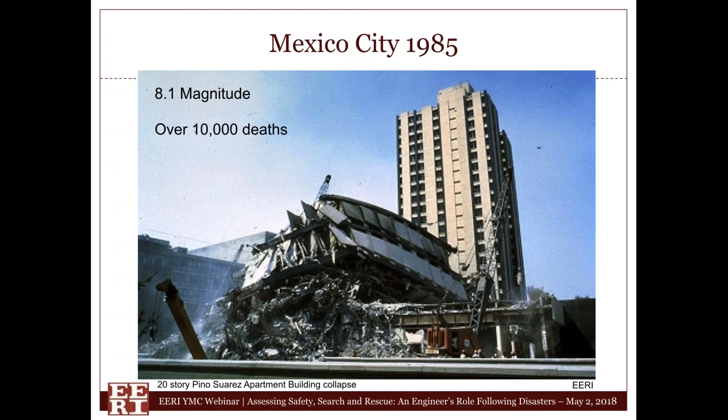A lot of the local fire departments have the ability to do light rescue and medium rescue, but heavy rescue takes a high specialization of intellect as well as materials. The collapse of the Juarez Hospital in Mexico City had many live rescues of people that were trapped. In fact, I believe the last live rescue was after 10 days. And it showed that a heavy rescue component to rescue people that were trapped was really needed in the U.S. And that's when it started, in 1990, the Urban Search and Rescue Program in the United States.

Currently, there's 28 task forces across the U.S. You know, California has an abundance of these, mostly because of the earthquake hazards that we have with the population centers. Florida has 2, mostly because of the hurricane potential out there. And there's a number around the Washington, D.C. metro area because of the sensitivity of the government operations in that area.

Now, with these task forces, there are a number of personnel all in a multidisciplinary role. We have, of course, the firefighter rescue components. We have the EMTs, search specialists, hazmat specialists, heavy riggers, and of course, the engineer will function in the structures specialist role. And there's communication specialists and logistical support. And they're all based usually around a fire department agency.

And when we get deployed, there's a type 1 deployment, and that's really the full task force, and it's up to 80 personnel. And there's typically 2 structural specialists that are normally civil or structural engineers that are deployed with this task force. The task forces are usually about 3 levels deep, meaning that if not everybody is available, there's certainly other people that can be drawn upon. So these task forces normally will have about 6 structural specialists on the rolls for deployment, and they'll draw 2 from that group of 6.

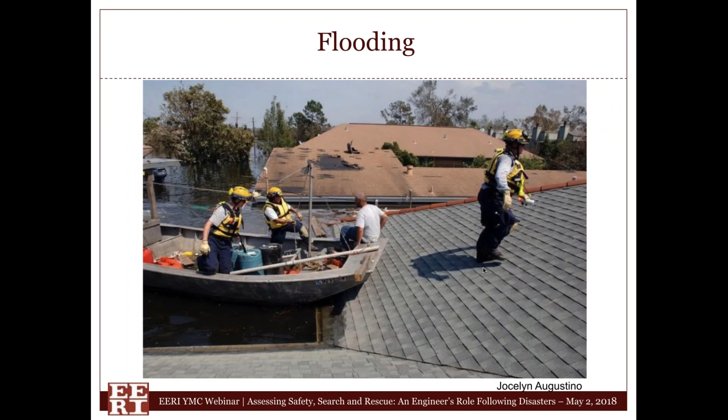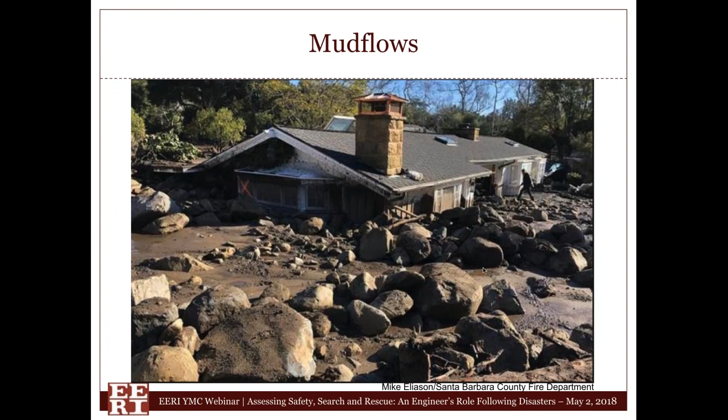Now, the role of the engineer in this task force, you need to understand that the work is being done in typically an unsafe building or an unsafe environment. And most will be multi-story buildings with heavy debris and potential for additional collapse. And the rescue and medical forces need to work in this environment if live victims are present.

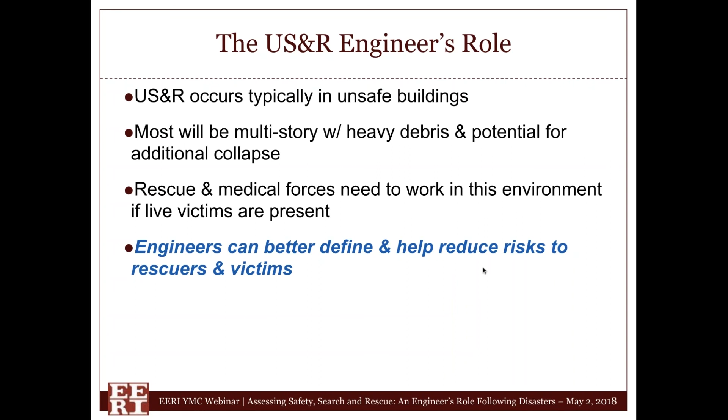So the engineer is there really to help better define and help reduce those risks to the rescuers and the victims. We're not necessarily there to actually do the heavy lifting, but to provide assistance and consultation as far as what we might see from our perspective. And our hazard assessment would be essentially identifying maybe those vertical and lateral systems to start, as well as determining really where that load path is most vulnerable.

Where is the critical load path, where are we standing, and where's the victim relative to that load path, and what do we need to move out of the way to retrieve the victim that might be in the load path? Is it brittle or ductile behavior as we're working on the building? So do we have any forgiveness if we make a mistake or if there's an aftershock? We check for redundancy. Again, we're looking for safety to the rescuers and ourselves and the victim.

And are the hazards something that can be mitigated to an acceptable level? Can we do it with shoring, or is there any toxic environment, hazardous materials that need to be taken care of first? Or is there a number of rats that are involved in some of the areas that have to be mitigated first before we can enter some of the environments? All these have to be taken into account.

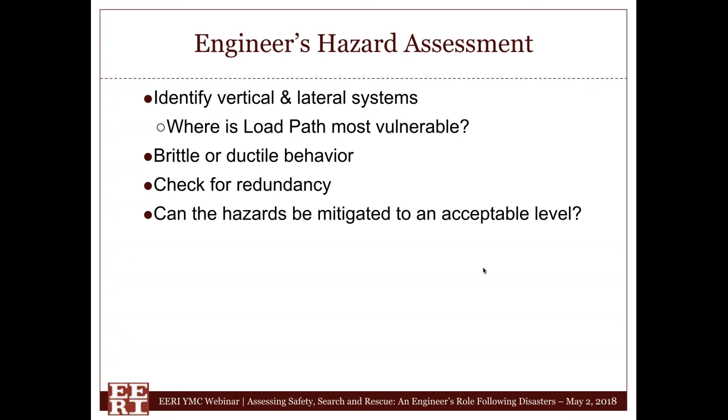So as far as what the engineer is looking at is, what is this risk during the mitigation? We're going to be putting in shoring, possibly, and is it a safe environment to work in while putting in the shoring, or is it just considered to be unsafe until the shoring is established? And we're going to be checking for potential instabilities along the way, both in the building and the rubble. A lot of times the rubble is considered to be unstable, especially while removing it.

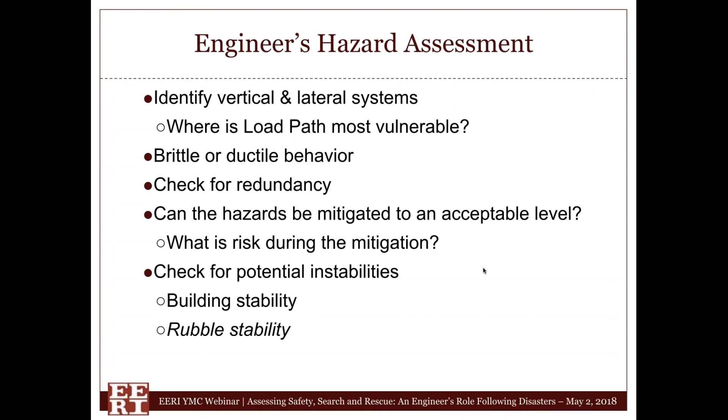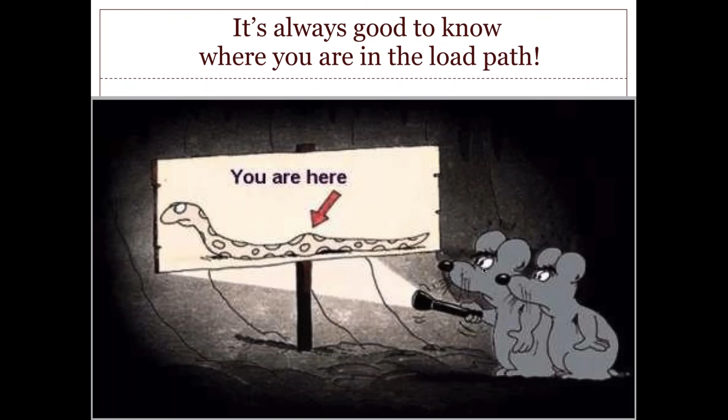It's always good to know where you are in the load path, because if you are in a bad portion of the load path that is very vulnerable to aftershocks, you may not want to be there and working there. So the engineer's assistance for the rescue, once the victim may be located and be retrieved, you need to determine the location and the condition of those voids. With our knowledge of buildings and building collapses, we may have a better idea where survivable spaces may be.

Not only that, but if we know we have a victim or someone we're going to retrieve, we're probably in a better situation to predict what materials are going to be anticipated as we're trying to breach into that cavity. Are we dealing with post-tension concrete, or is it just simply standard concrete? Is that masonry hollow core, or is it simply going to be solid grout with reinforcement? And is this concrete topping we're finding on the floor just an indication of a thin, lightweight concrete topping over wood, or is it actually something much more robust?

And we can help provide assistance to the rescue crews as we see this. Where's the best access for search and rescue? Maybe with our knowledge of the different materials and the types of buildings, we can direct them where the best direction for access to a void may be.

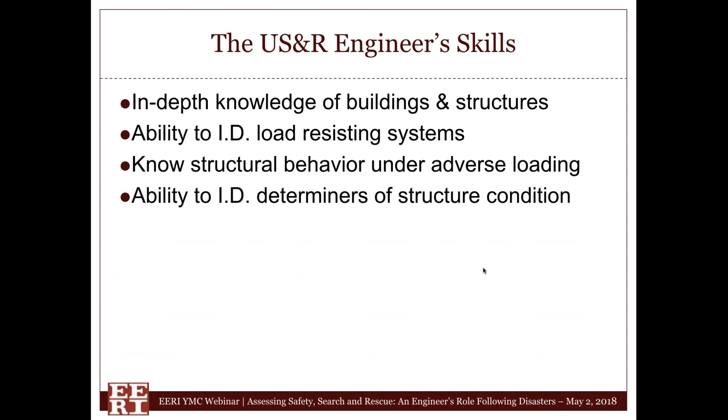So the skill set that an urban search and rescue engineer needs to have is certainly an in-depth knowledge of buildings and structures, the ability to identify load-resisting systems, know structural behavior under adverse loading, the ability to identify determiners of the structural condition. Is it going to be vulnerable to any sudden aftershock, or is it simply going to be fairly stable at that point? Certainly you need to have a knowledge of typical collapse patterns under wind, earthquake, and blasts.

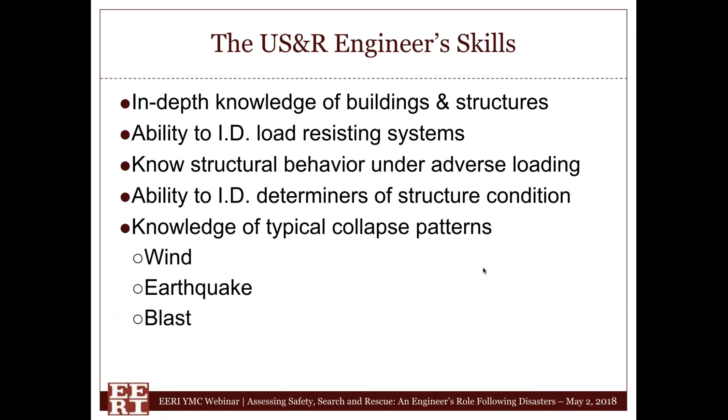Now, don't expect everybody to have all the materials needed to do some of this rescuing on a standard fire department engine company. So a lot of this is going to be housed in a warehouse close to a fire station or within the fire department, and this cache is about $2 million of specialized equipment. There's special cutting tools, shoring and lifting materials, confined space operations.

We have search cameras, listening devices. We have total stations that will monitor and survey different buildings for any movement. Search dogs, of course, medical supplies that are meant mostly to stabilize the patient for transport, as well as anything that might happen to the task force member. We have both global satellite and confined space communications, hazardous material monitoring equipment, as well as food, shelter, and water for 72 hours of being self-sufficient.

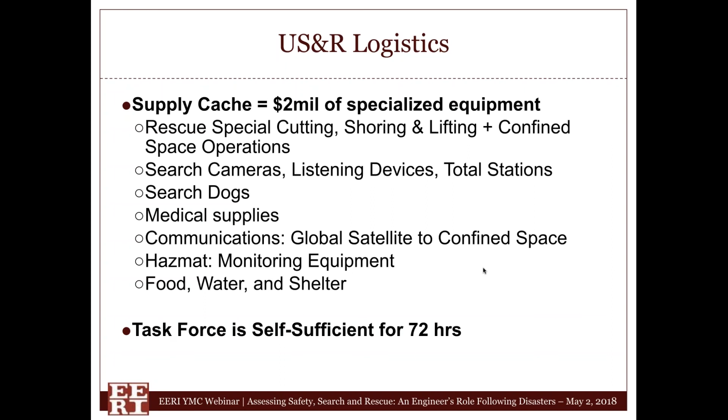This equipment needs to be transported, oftentimes over long distances. It's designed to fit in a single military aircraft, say a C-17 or 141, or split into two pieces on a C-130 transport plane.

And theoretically, with a 6-hour notice, we should be in a wheels-up position, so the task force is usually ready to be deployed at any given notice, to be sent out to usually a military Air Force base or local airport if necessary.

And our initial operations are in a sort of a blitz mode where we would conduct rapid structural triage in a multi-building event, trying to determine which buildings are the low-hanging fruit for rapid rescue. And this would be done with not only the structural engineer, but also with a rescue team manager and a hazardous material specialist. And we'd be doing some initial reconnaissance to start looking at where best to retrieve live victims.

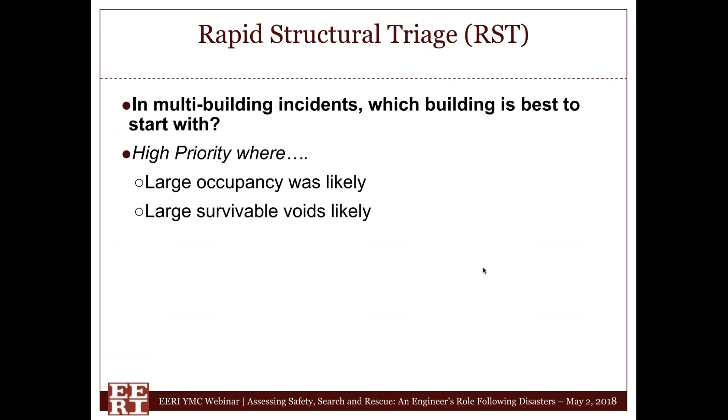And the high priorities, we're going to be looking at where is a large occupancy that was likely during the event. And where would we find a collapsed building that has large survivable voids? And we have to consider how long is the time to access the victims. If it's going to be quick, it's going to be a higher priority. Hazards that can be easily mitigated must be considered, because if the hazards are going to be there during the entire rescue, that's going to be making it a lower priority as well.

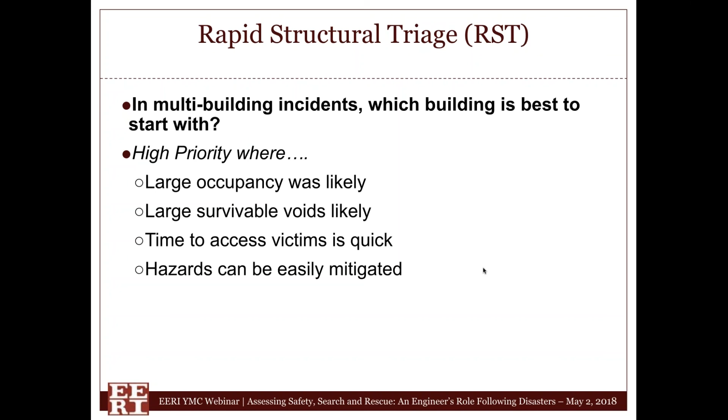So if we're looking at a building that has a collapse such as this after an earthquake, we want to know, well, what is the chance for viable victims? Well, it was an office building, and the earthquake occurred at 9:50 a.m., so we have a high potential for trapped victims based on the time of day and the use of this building. We also recognize it's cast-in-place reinforced concrete. That's going to make it more difficult to access the victims than if it was a different material.

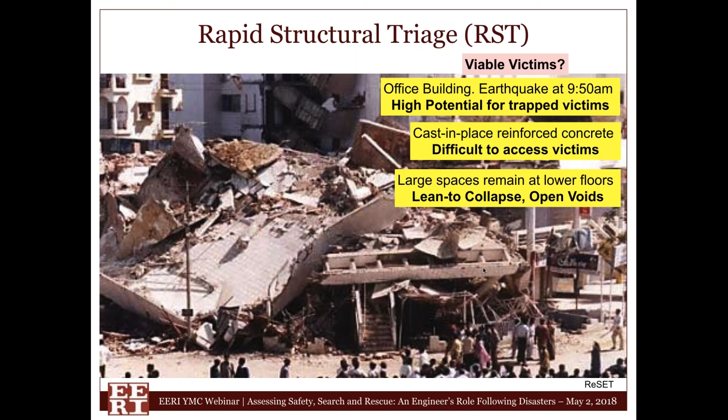We also have large spaces that are probably underneath these lower floors, because this is a lean-to collapse with open voids. And so when we look at our structural rating for possibility of viable victims, we would simply click the marks here and come up with a medium probability of viable victims. Now we need to assess risk.

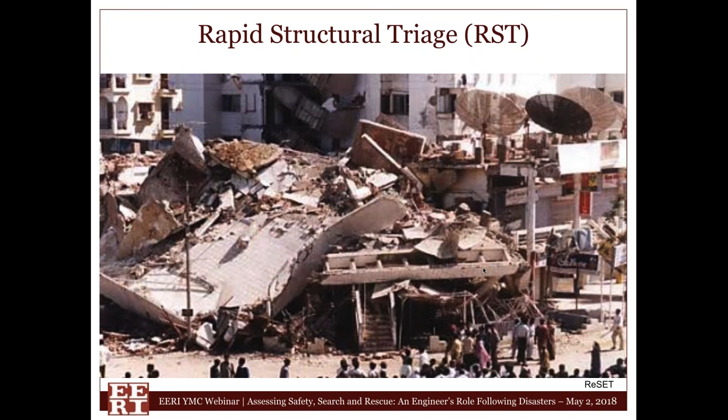We look at the building, and we are looking at the fact that we have floors draping over intact concrete walls. That would probably mean there's a lower chance of further collapse, recognizing this building probably dropped some significant distance and landed in this position. The impact was probably much greater than we're going to have any time from this point forward.

We also see, though, a lot of loose pieces of concrete hanging around, and each one of those is a potential death drop onto the head. So we recognize that we have some falling hazards. There's a medium number of those that would need to be mitigated. And the lower floors probably have robust concrete walls creating a good void support condition.

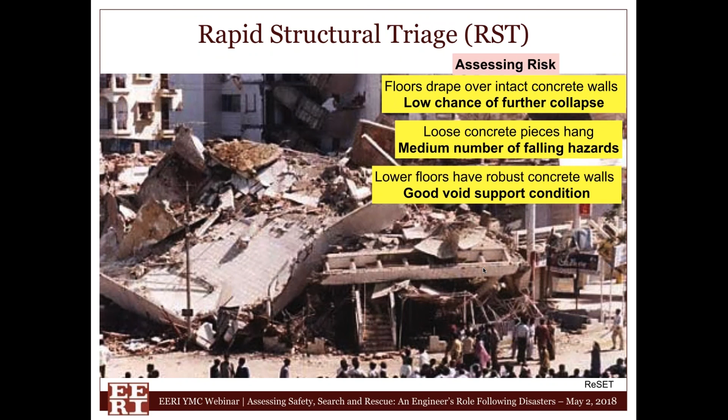So we go back to our structural rating, and we rate the risk, and we just go ahead and give this a low risk. And now we move on to the next building. It's as fast as that. We have a chance to maybe walk around the building, getting a little bit of an idea, talking to people if we know of any live people that have been hurt or any knocking, things of that nature, but you can't spend too long in these large multi-building incidents.

So we have a medium probability for rescuing viable victims with a low risk. This would be a recommendation only. Simply, I'm providing this to the task force leader. He can certainly overrule me.

An example is if there's a school of children with maybe 5 of them trapped, that's probably going to have a higher priority than 100 people in an office building, simply because politically children tend to be always where the priority wants to be. Those choices are made outside of the engineer and more by the task force leader and the local jurisdiction.

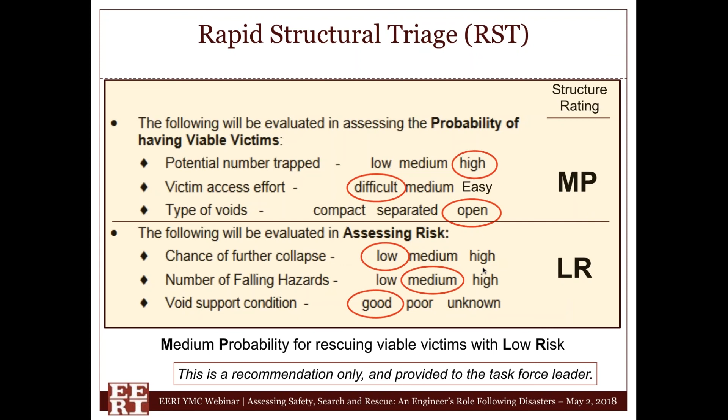Something to think about when it comes to survival rates of trapped earthquake victims is it's so important to be able to rescue these people within the first day or so, because after the first day, survival drops very dramatically. After about 5 days, it's rare to find anyone alive, but it has happened. Again, in Mexico City, they found infants in the Juarez hospital out as far as 10 days, and in Nepal, they made several rescues on day 5. Trapped victims from blasts have much less survival because of usually the effects of the blast itself.

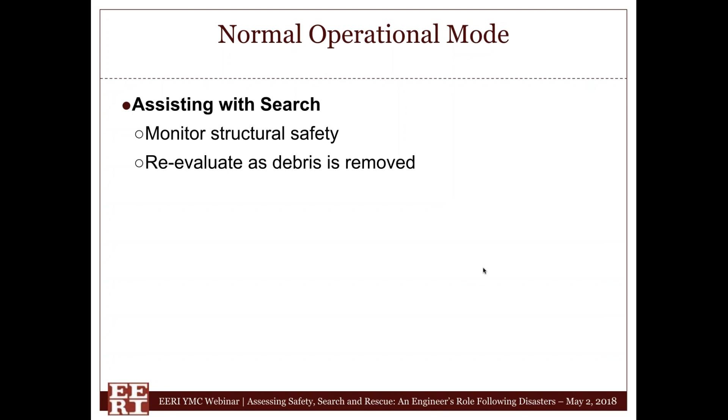So in a normal operational mode, this is after the rapid structural triage, we will be assisting with the search. We'll be monitoring the structural safety of the building. We'll be reevaluating as debris is being removed, because sometimes the debris is actually providing strength to the damaged building. We'll also identify hazardous areas that are off limits.

Then we'll be assisting with the rescue. We'll suggest access locations considering the material and the stability that's nearby. We'll be assisting in the shoring design that may be necessary to mitigate some of the risks. And we'll be monitoring the structural safety as the rescue proceeds.

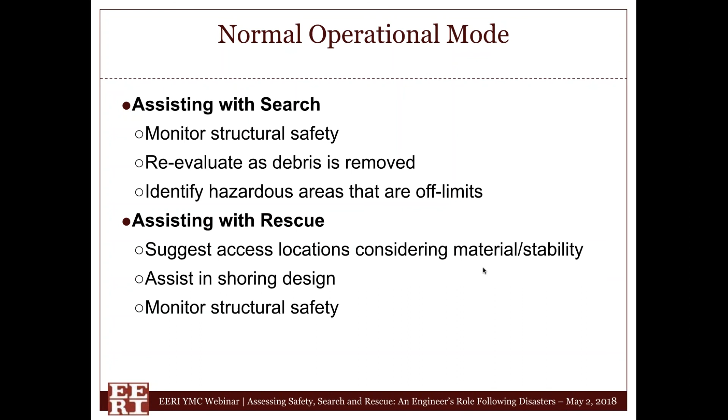Security is always a concern. Everybody has a security ID tag. Many places that have had devastating earthquake damage, such as Haiti, the response was delayed due to security concerns that were on site. Our dogs are no exception.

The dogs provide abilities to go into these buildings where there's potentially lots of hazards that were unacceptable for people to enter. And the dogs have an uncanny ability to locate live victims. These are special search dogs that are not cadaver dogs. They're not looking for dead victims. In fact, they're trained only to scent on live victims.

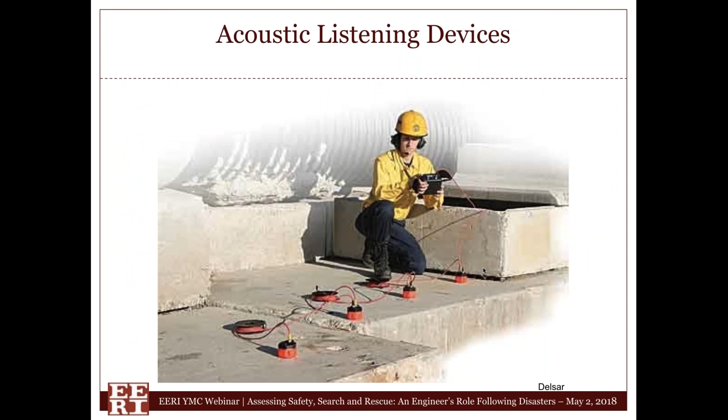Acoustic listening devices are a special tool that we have in our arsenal for locating people, as well as search cameras that can go into the debris with an articulating arm to be able to find if we have live victims in any voids.

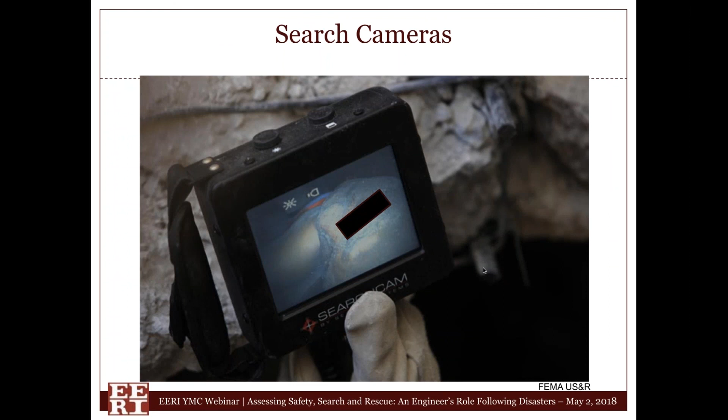Now, the structural specialist, the credentials to be in this is you need to be a licensed professional engineer. And there are some exceptions for architects that are on some of the task forces as well. And you need to have a specialization in structures or an equivalent. You need a minimum of 5 years of engineering experience, including structural design and analysis, evaluation of existing structures, construction observation, and inspection.

Also, you'll be required to complete a FEMA structural specialist course that trains the structural specialists in recognizing different collapse hazards as well as locations of voids. And this is conducted by the U.S. Army Corps of Engineers. And there's a lot of ongoing task force training that is required as well.

In fact, this is a list of some of the ongoing task force training that my department requires, not only training in structural collapse and stabilization, but training in rapid structural triage and hazard assessment mitigation, structural monitoring and surveying with the total stations, ATC 20, which is post-earthquake safety evaluation of the buildings, and Rescue Systems 1, which is actually training with the firefighters themselves as a firefighter course where you're going to be learning all sorts of rescue techniques.

Hazardous material, you're going to be in a first responder training situation for that, also confined space entry and rescue, not for the faint of heart who are claustrophobic, trench rescue techniques, weapons of mass destruction. It was felt that in a situation where it could be a biological weapon as well as a nuclear weapon, we may be called in to act, and so it's to provide safety for ourselves in those situations as well.

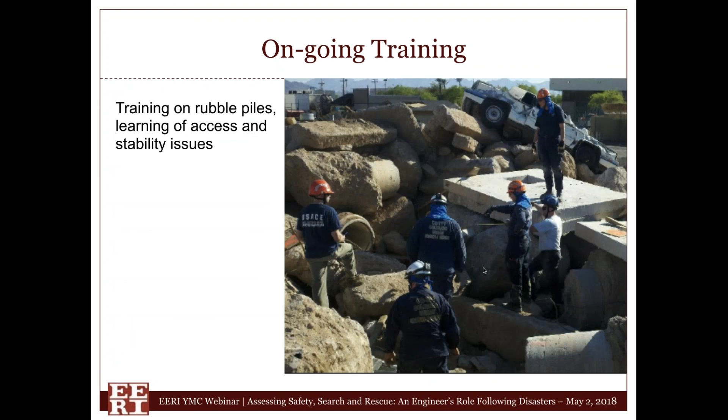Ongoing training such as this is a rubble pile. We're learning access and stability issues and training on those types of situations. Here's a structural specialist from New England who's exiting one of the voids. We also learn high-angle rescue skills for pulling people out of vertical spaces, or if we have to actually descend ourselves into an area to provide shoring.

And then, of course, the learning to monitor buildings with total stations. These are able to detect the slightest of movements to determine if a building may be starting to become unstable, or if an aftershock has caused a building to become a little bit more out of plumb.

There are various training facilities. This one by the Army Corps of Engineers is in Moffett Field, and it's sort of a disaster city type of scenario where they have both rubble piles, damaged buildings that are modeled, as well as confined spaces. We learn to shore and all sorts of modeling of disaster scenarios.

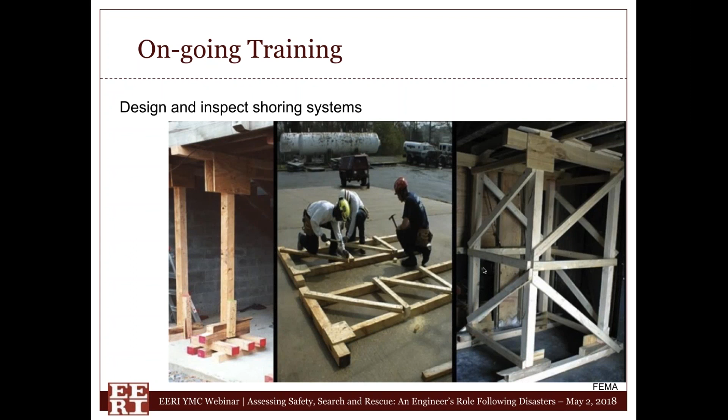Some of the shoring systems that we construct, we don't go out and pull out a calculator necessarily to design these. They are pre-designed with pre-designed load configurations in them. Each one has a special purpose that we use, whether it's a vertical shore or a horizontal shore. And these systems are all in what we have, a field operations guide, or FOG. The structural specialist has their own structural specialist field operations guide that provides information on shoring.

This is an example of one of the shores that we can provide, and it provides additional ideas of how much capacity this system has based on how high the shore is and how to build these. And the firefighters all train building these shores. They don't necessarily have a good idea how strong they are, but they know how to build them. And as an engineer, we can direct them to build them, and we're simply also computing in our mind a rough idea of how much load it might need to take.

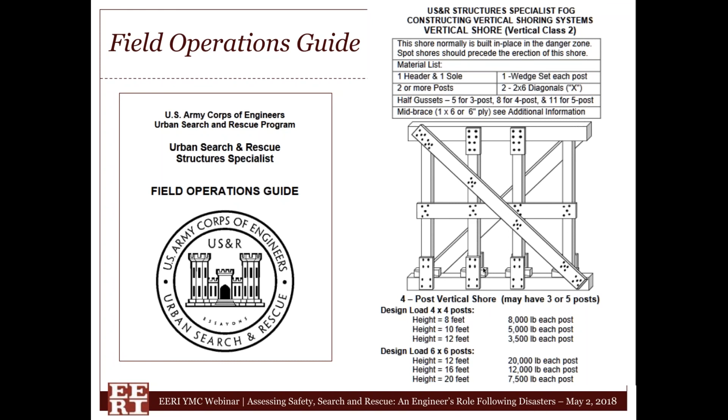Here's a shore that was installed in an earthquake-damaged building. We were worried about side sway collapse of the first floor, and it can provide a nice, strong vertical.

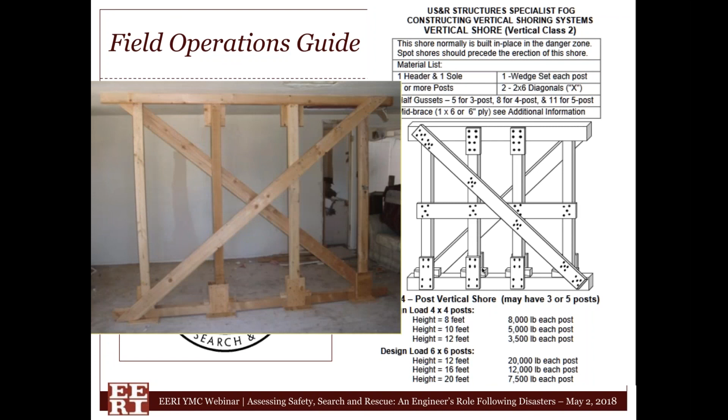Some guidelines on how to operate the various pieces of equipment, such as the total stations, the GPS, how to use the GPS for tagging buildings to send to a follow-up rescue crew, and how to navigate through an area without roads or without street signs anymore that are visible. Laser range finders, rebar detectors, smart levels, material weights, capacities, knots, all sorts of great information.

You might actually want to take a look at it. It's actually downloadable through a website, disasterengineer.org, and it is certainly available for you to peruse through and become acquainted with. Now let me give you an example of one deployment.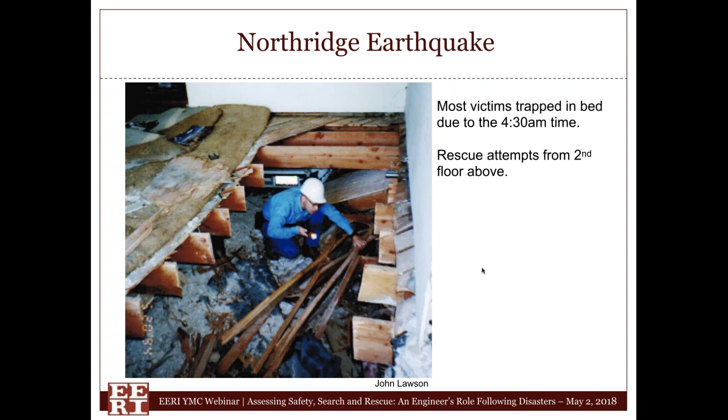Also in the Northridge earthquake, there was a victim that was in the Northridge Fashion Mall parking structure, a street sweeper that was actually cleaning the building at the time of the earthquake, and he was rescued alive as well.

Now, in the Murrah Federal Building, which was in Oklahoma City, I was there for 6 days of the rescue operations. There were 11 task forces from the U.S. that responded. There were 6 at one time. It was a 15-day incident. And we had a total of 37 structural engineers that were part of the FEMA task forces at the location.

This is a lot of devastation, but it's hard to believe there were only 4 columns that were compromised, that collapsed, and it created this type of partial collapse within the building. Also across, there was the Journal Record building, and really quite as far away as several blocks, there was damage. People died just across the street as well, so it was a multi-building incident.

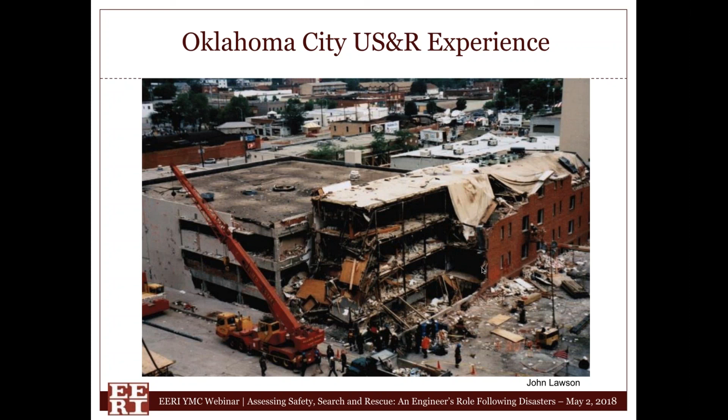And you can see on the left, this was just after the bomb had exploded. Lots of hanging debris, very unsafe to work in this environment. In fact, there was a rescuer that was killed within the first 24 hours because of a falling piece of debris. This was not a rescuer of the FEMA task force system, but a local rescuer. On the right, you can see when we've cleaned up the debris, making the rescue and the search operations much more safe to work in.

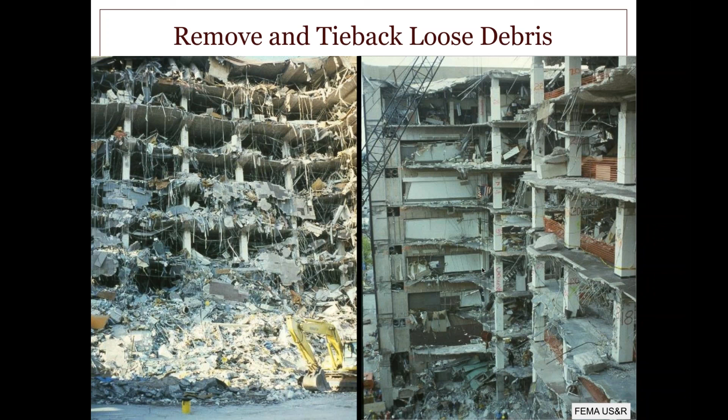There's a lot of people on these incidents representing many different jurisdictions. And there is a lot of rubble, and the building safety could be compromised very quickly. You notice those columns on the right no longer have the 3rd floor attached to them, and so the slenderness of those columns is suspect, and we have lots of debris pushing on them as well. We monitor the buildings. These are some SMART levels that we look at, making sure that we don't have anything suddenly occurring. We have punching shear failure here from the blast.

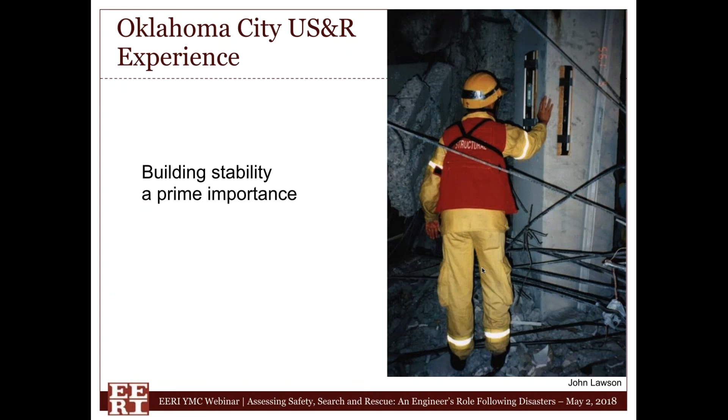You see we had to put in some additional braces. There's a steel pipe brace coming in because of the slenderness of this column. It was just too risky to continue operations and remove debris adjacent to that column. We also had to repair some of the columns. You can see the steel jacket to the right with grout that's been put in. That's Dave Hammond, one of the senior structural engineers with FEMA IST, investigating some of the repair work there.

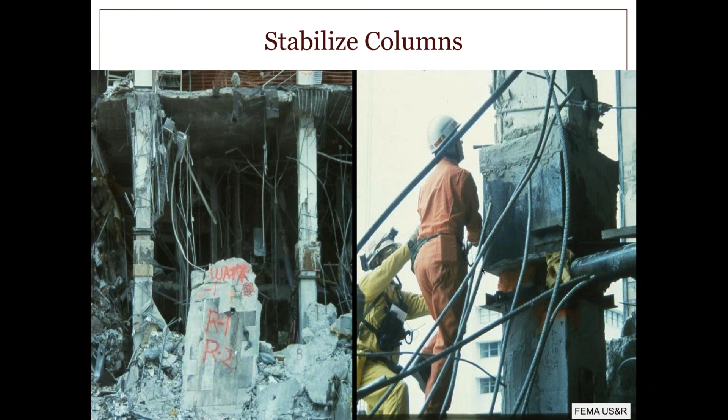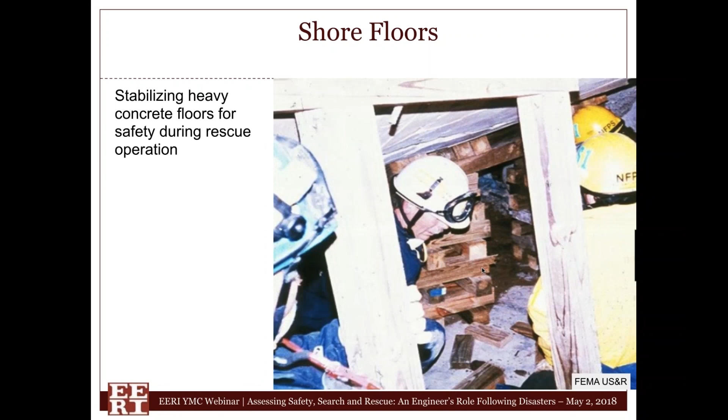On the left, you can see again these columns, very dangerous to work in this environment. We put in some shoring on the left, shoring on the right, so we can work underneath to retrieve some of the victims. Sometimes we're tunneling underneath to put in the shoring, and our cache actually has a lot of this wood with it, and we draw upon local resources as well. That's yours truly there, looking and actually tagging areas that are considered to be off limits because of danger.

This is frightening, where an engineer on top or an operation working on top has no idea that all the tension steel has been ripped out of the bottom of the slab on grade, or the elevated slab, during the collapse. And this lack of tension reinforcement made this whole area really off limits. There are some exceptional falling hazards in this. You can see that big piece of concrete hanging up near the top of the building.

That was hanging only from a couple rebar, and the question came to the engineers, can we work underneath that? Well, we simply looked at it and said, well, it's about 20 feet by 16 feet roughly. That's 320 square feet. It's about 8 inches thick, 8-inch thick concrete. That's about 100 pounds per square foot. 320 times 100, that's 32,000 pounds. 32,000 pounds hanging. That looked to be pretty scary below.

So we'll go ahead and go around the back, only to notice it's hanging from a single rebar, a single number 8 rebar. We could look at the grade of the rebar from the ribs on the rebar. It was grade 40 because of the age of the building. A number 8 rebar is about 0.8 square inches times 40. Guess what? It's 32,000 pounds. We have the weight of the slab equal to the strength of this number 8 rebar. It did have 2 of them attached.

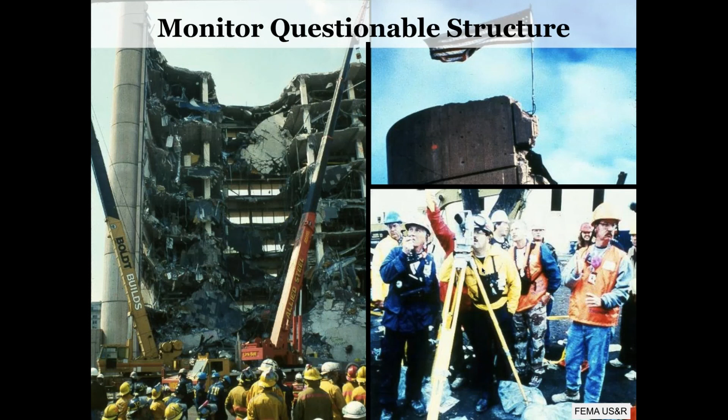We continued to monitor it by the Army Corps of Engineers. There were some high winds that we had to worry about, but these are the types of things that engineers do when they're looking in these environments. Of the 168 victims, only 2 were not recovered within the 15 days of our activity, but those 2 were recovered after the building was demolished because we knew exactly where they were.

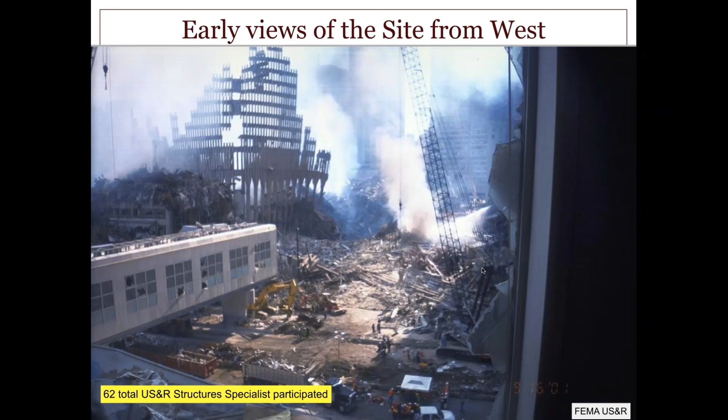The World Trade Center, another deployment, even though it's not an earthquake, it was significant. Lots of damage. There were 24 task forces that were sent in. We were rotated in and out. Lots of people on this incident, but it was totally overwhelming. There were a total of 62 urban search and rescue structural specialists that participated in this event. And a lot of the work is simply looking at debris and monitoring it for hazards while they were working through and trying to retrieve victims.

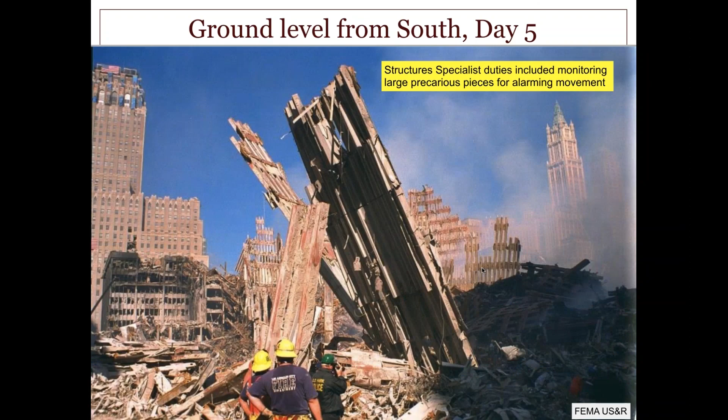Large pieces that were potentially going to fall, we would monitor these with total stations, looking for any sudden movements or slight movements that would indicate that it was a dangerous place to operate. Lots of heavy steel debris made the work very difficult. Some of the steel sections were extremely thick, making it very difficult to move or penetrate.

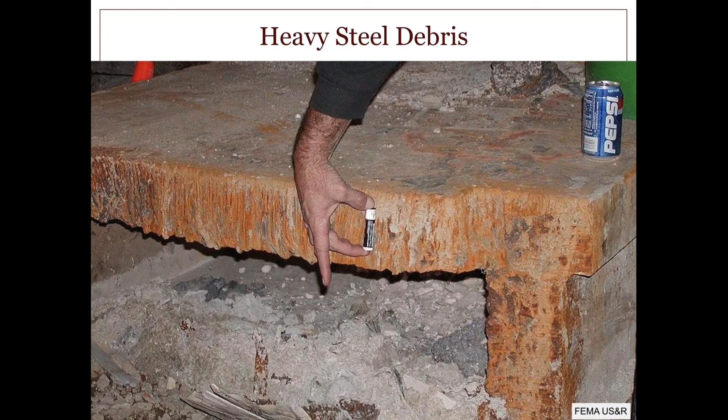The local New York City Structural Engineers Association provided a lead on this type of work. Their high-rise engineers worked around the clock in different shifts. Thornton Tomasetti, LZA, was the lead engineer, but there was also work with Leslie Robertson's office, SOM, Weidlinger, as well as some others. There was also a special slurry wall basement that keeps the Hudson River from flowing into the basement of the World Trade Center, and Mueser Rutledge was the foundation engineers that investigated and monitored that.

More recently, the Nepal earthquake response. There were 54 task forces sent, but this was from a global response. There were 23 different countries, 150 canine dogs, 1,800 personnel. We sent 2 of our task forces from the U.S., which was 114 personnel, as well as 12 of our search dogs.

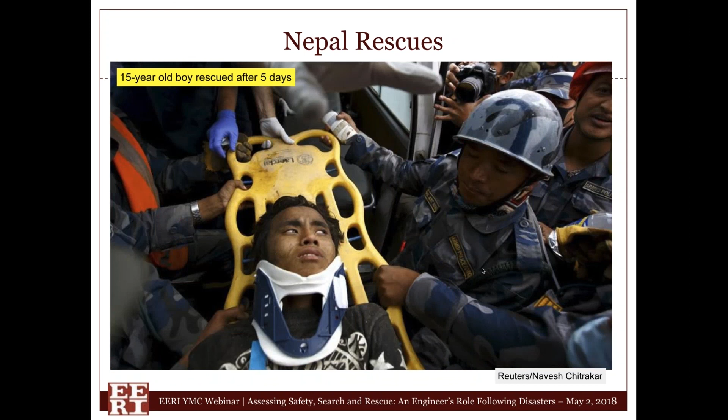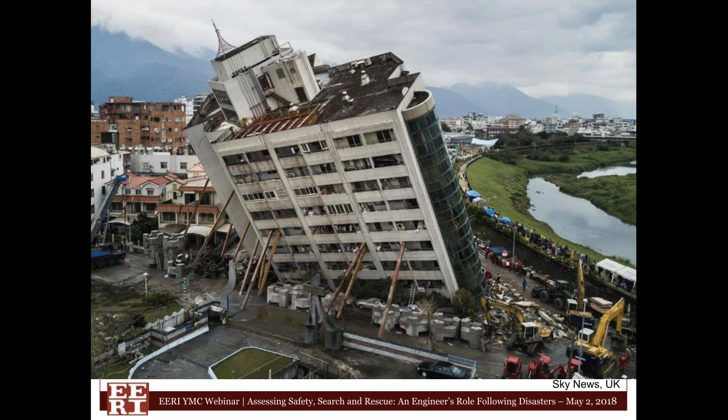Now, if you want to have something less intense to do, maybe you're not really looking for getting involved in something quite that extensive, you can become a safety assessment volunteer. And that would be simply being able to rapidly assess buildings as far as safe or restricted use, or whether they're just simply an inspected safe situation, unsafe or safe. And that is something that is very necessary so that people know whether to go back in their building.

And this also was born sort of out of earthquakes in the 1980s. And in 1989, ATC 20 was published. And the idea is you do a rapid evaluation to determine whether it's a green, yellow, or red placard that's going to be tagged on the building. And if it's yellow, simply because it's questionable, it's going to be subject to a detailed evaluation later.

So if we're looking at a rapid evaluation, you only have 10 to 30 minutes. You're typically on the outside of the building only, and you're going to be doing it either as an engineer or a building inspector, or even architects are all working on these rapid evaluations. And sometimes it's the only evaluation a building will get.

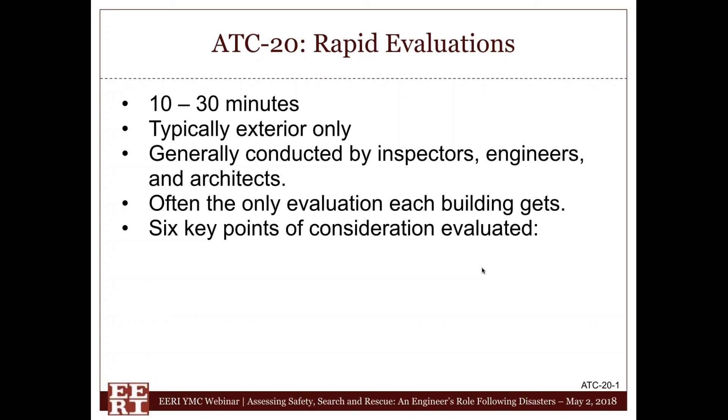And the 6 key points that are typically looked at: has the building had any collapse or moved off its foundation? Is it significantly out of plumb? Is there any severe damage to any significant parts of the building that are important? Is there a parapet, chimney, or other falling hazard? Are there large fissures in the ground? Or is there anything toxic or any other hazard present? And you're simply spending a short period of time to evaluate these and post it.

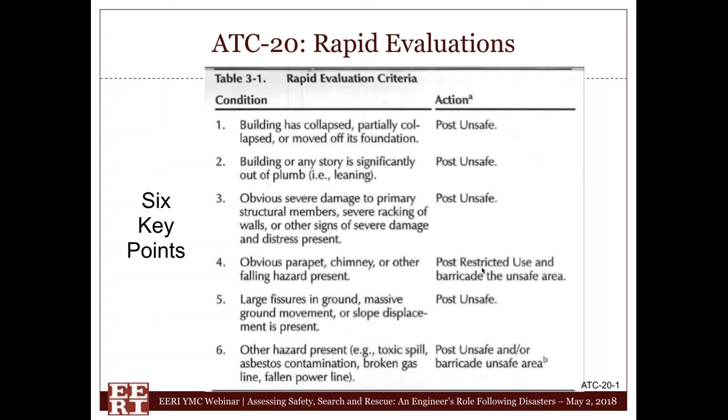And then going ahead and post it, if it's questionable for future follow-up, it would get a yellow tag for a more detailed evaluation. And that detailed evaluation would be, again, for those yellow tag structures, which are going to spend some more time, a 1 to 4 hour time period, typically looking at the interior as well as the exterior. And it's normally performed by a structural engineer or someone with expertise in that building type. And then that would be simply reevaluating that yellow tag into some other color, green or red, unless it's still undetermined, and then it would have to go on to a local structural engineer for further evaluation later.

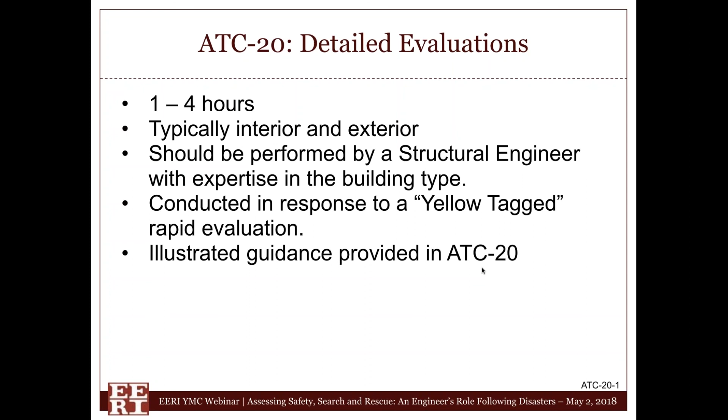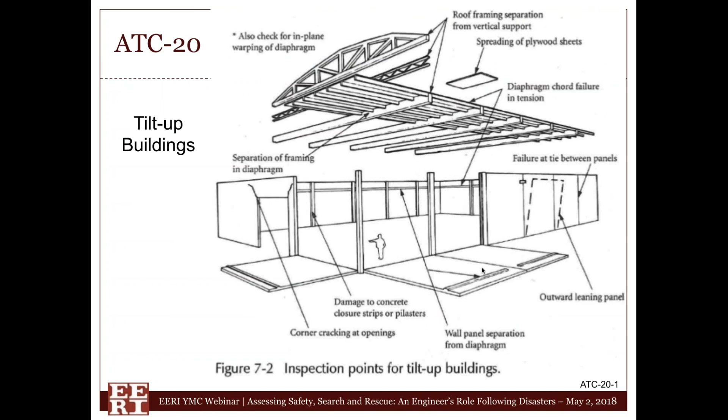And ATC 20 provides guidance, such as places to look for the building type, whether it's wood or URM or tilt-up buildings. You're going to be looking at some hazards as far as the panels falling away from the roof, or do we have chord failures, different inspection points to help assist the engineer evaluating the building.

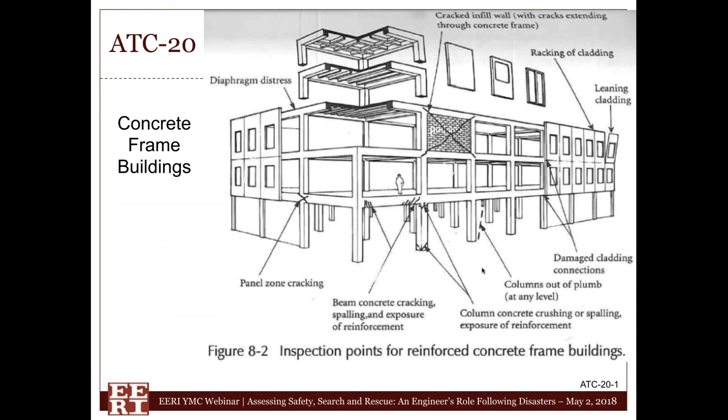And these are useful for even students that are brand new, younger members of the professional communities to simply say, well, if I'm going to do reconnaissance, what should I be looking for? What are those things that are certainly easy things to spot? And the ATC 20 document is valuable for that. And a lot of these pictures have also been adopted into that field operations guide that the urban search and rescue people use as well.

In Loma Prieta in 1989, it was really the first time that ATC 20 was used. It was really hot off the presses, and we were able to simply start posting these things. In fact, many of the jurisdictions had to simply make photocopies. They didn't have the colors yet because the document was so new and they were unprepared for it. With the Loma Prieta earthquake, there was a mutual aid response within California.

The idea is that if the San Francisco Bay Area has a bad earthquake, the local engineers will be too busy with their own jobs, their own clients, and that there was this sort of mutual aid response that Southern California and the Central Valley would respond in this time of need for the jurisdiction.

And we were flown into the city of San Francisco. We were all deputized as city inspectors. We were given a vehicle, a driver, a radio, a list of addresses, a bunch of colored placards, the field manual, and recording forms, and we had at it and tried to cover as much of the city as we could.

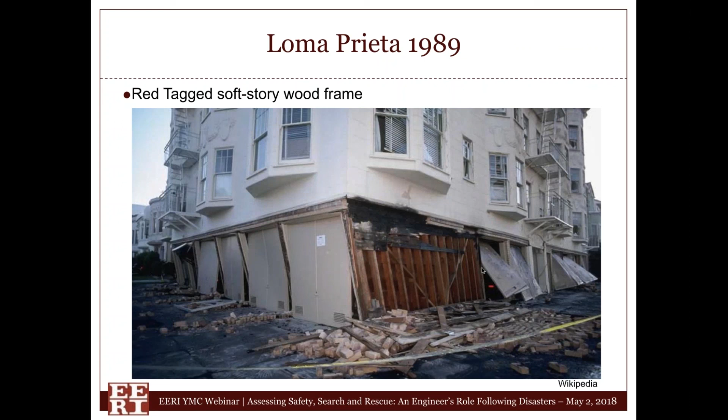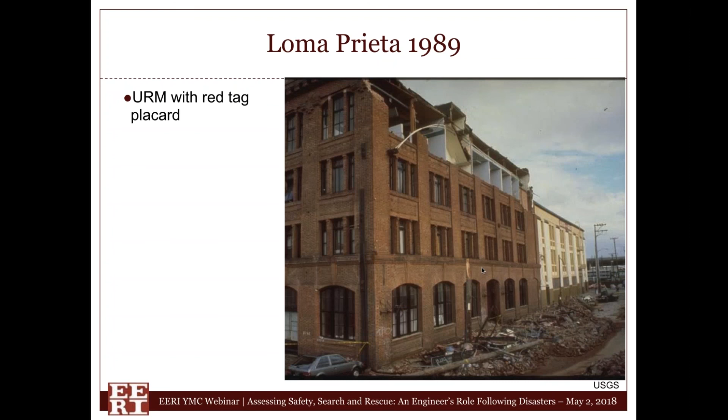Obviously, we had lots of red tag buildings where people were very distraught with what had happened, people not able to get into their buildings anymore because they were red tagged and the police were keeping people out, and lots of damage with falling debris where people thought the building looked pretty safe to go into, but the falling hazards were just too great to allow anyone to go into. And we got to realize interactions with the people after these events can be very, very unique.

During my work in San Francisco after the Loma Prieta earthquake, I was offered a couple times a bribe to change a red tag to a green tag. And essentially you had owners that didn't have earthquake insurance and they just simply wanted to go back in and not worry about the building. Or you had occupants that just simply wanted to go in and retrieve their belongings. In fact, there was one building that was demolished without ever allowing the occupants back in the building. Once you leave the building and it gets red tagged, it's going to be hard to go back in.

I also had people trying to convince me that their green tag placard should be a red tag placard. They wanted me to change it from green to red, saying that the building was unsafe. And really to get into the mind of what would cause someone to do this, well, you had landlords in rent control areas wanting to evict their tenants and reestablish higher rents. And you also had tenants that were desperate to move and wanted to break their lease.

And so you find that working with people, you just simply have to do your job and move on. And you'll find that we do a lot of training in ethics in these types of scenarios and recognize that we have to just simply avoid that confrontation with people and inspect it the way we see it.

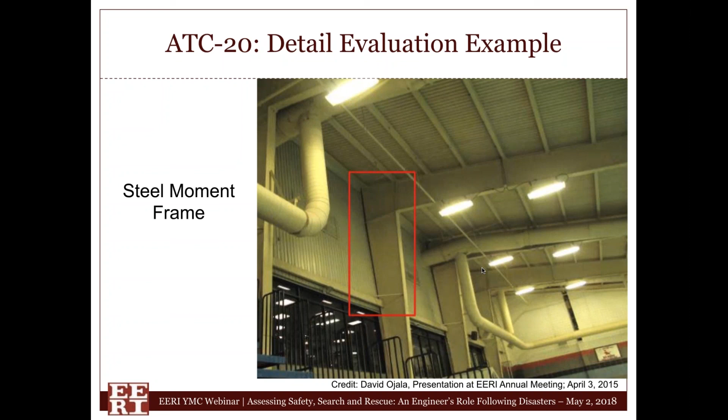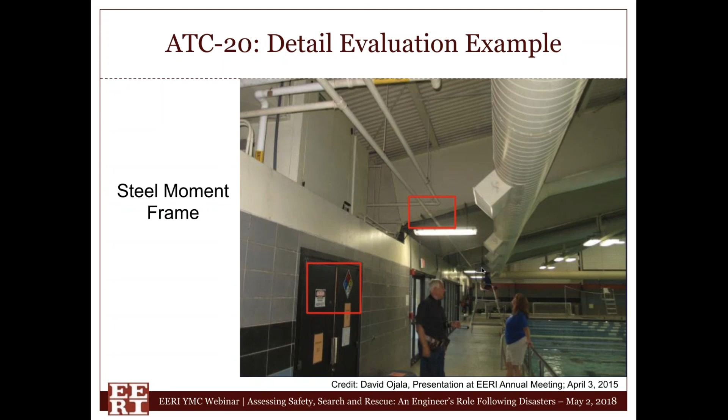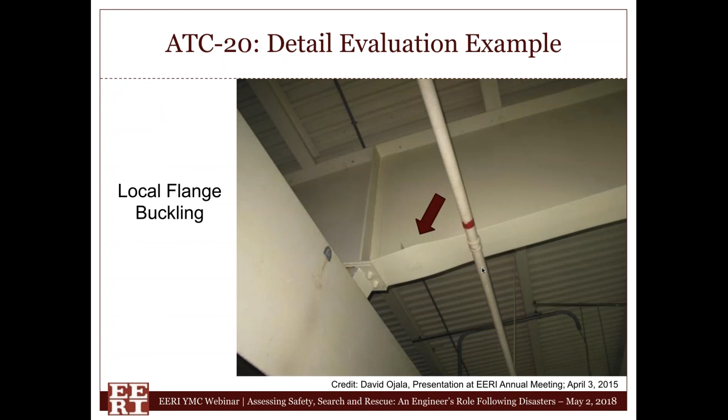Detail evaluations: this is just an example I borrowed from a presentation that was at the EERI's annual meeting in 2015. This was a building that was evaluated, and we find that the steel moment frames have local flange buckling at the joint between the beam and the column. And in fact, here you have hazardous materials that are stored in the building. It's an inside swimming pool, and you have local flange buckling at all these conditions here, indicating a significant weakness now in the structural system. But there was a lot of redundancy because there were a lot of these moment frames.

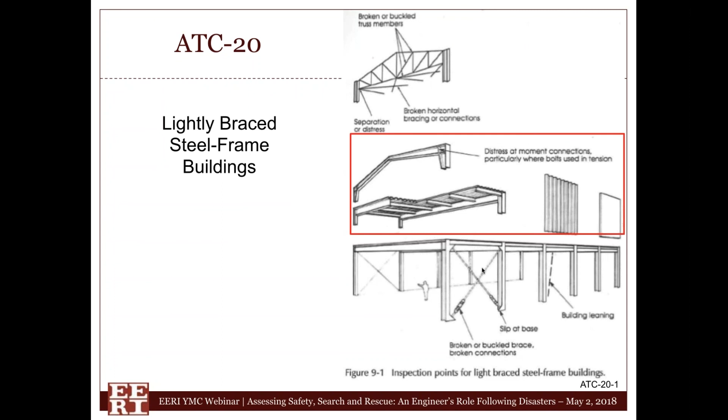So you open up your ATC 20 and you notice that something you need to be looking for is the distress at moment connections. And flange buckling near moment joints is considered to be unsafe for a posting. And so that would be a reason to post this building unsafe simply by the number of interfaces between the beams and the columns with local flange buckling.

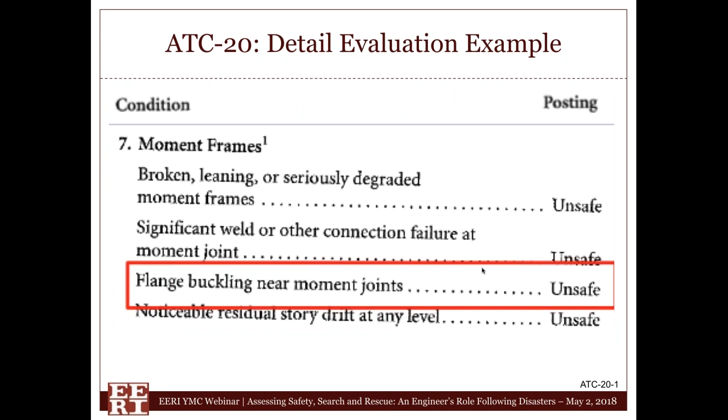So you may be wondering, how can I get involved in the structural assessment program? Maybe urban search and rescue is not your cup of tea, but you'd like to certainly help as far as evaluating buildings quickly after a disaster. Well, you should be a licensed civil or structural engineer or architect or certified building official, and you have to complete the safety assessment program training to be an evaluator.

And the training was originally established by the California Office of Emergency Services, but it's recognized now in many different states across the nation. And the ATC 20 training is about a 6-hour class. And once you complete that, most states recognize you as being certified to be able to conduct these types of structural assessment programs. There's also special training for windstorms and floods, which is ATC 45.

The training is facilitated by NCSEA, that's the National Council of Structural Engineers Associations, and Cal OES, and Texas and Washington State's Structural Engineers Associations, ASCE, AIA, and APWA, that's the Public Works Group, all have training or links to the training for this purpose.

Also, I must mention that NCSEA has a structural engineering emergency response database that they're putting together. So if you are trained, they're trying to create a roster of second responders that can be shared with ICC, the International Code Council, as a single resource where people can be drawn upon after an earthquake. And our deployment in these situations is really there to assist the local government to tag buildings.